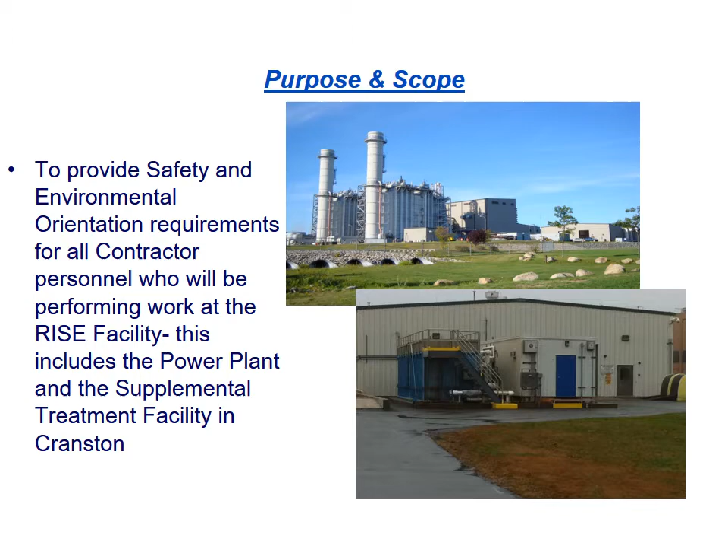The purpose and scope of this presentation is to establish safety and environmental orientation requirements for all contractor personnel who will be performing work here at the RISE facilities, which includes the power plant in Johnston and Supplemental Treatment Facility, or STF, in Cranston. These guidelines are not intended to supersede or replace the health and safety requirements contained in the contractor's purchase order or any other applicable health and safety regulations. All contractors must comply with all applicable laws pertaining to health, safety, or the environment.

Responsibilities. A RISE contractor coordinator is assigned to oversee all on-site contractor work activity. The contractor coordinator will be responsible for ensuring the contractor performs all work in accordance with the guidelines established in this presentation. The contractor coordinator will consult the Production Technician Leader and/or the production manager in cases involving violation of the site safety requirements. In cases involving violations of the requirements, contractor personnel may be immediately removed from the site.

The contractor supervisor is responsible for assuring that the contractor personnel abide by the site safety and environmental requirements reviewed in this presentation. The contractor supervisor is responsible for ensuring that his or her personnel have received the proper environmental, safety, and health training required to perform their work assignment. This is to include any federal and/or state required training.

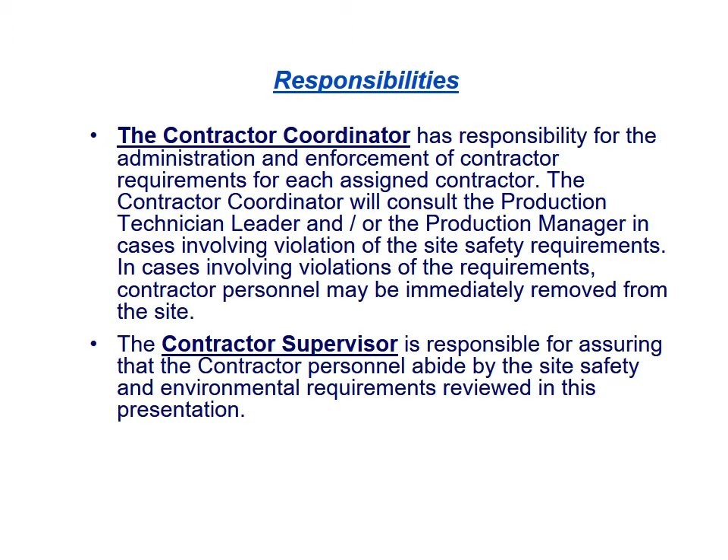Emergencies. Be sure to report any emergency immediately upon discovery to the control room, either by radio operated on channel 1 or by telephone. To report an emergency by telephone, dial extension 555 from any phone in the plant. You can also use a cell phone by dialing the plant number 401-946-2883 and then dial extension 555. You will be connected to the RISE control room.

An individual reporting an emergency should provide at least the following information: 1. The location of the emergency, and 2. Specific information about the emergency, for example, whether there are injuries, number of injuries, fire presence, etc.

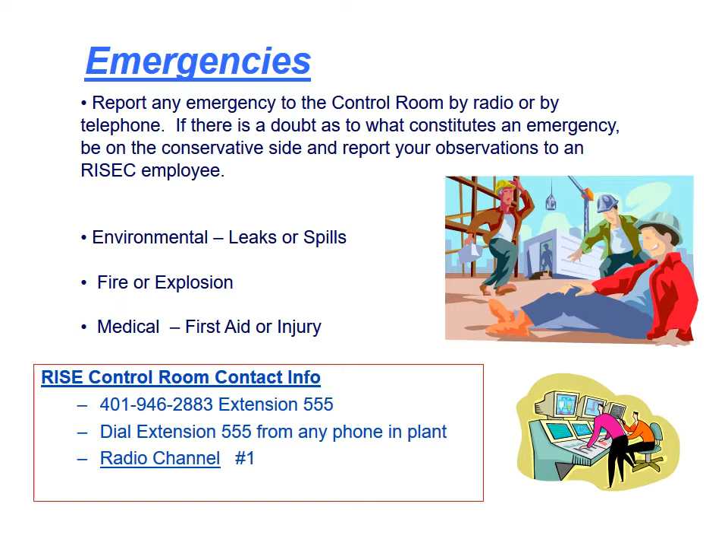There is no first aid facility at RISE plant. In the event of a medical incident, contractor personnel shall immediately attend to their own injured personnel. Emergency medical assistance should be obtained immediately by contacting the control room at extension 555. The control room personnel will contact local emergency medical services. Please do not contact 911 directly during a medical emergency, as this will prevent an organized emergency response from occurring.

RISE plant evacuation procedure. In the event of fire or evacuation alarm, proceed immediately to the designated muster point. The fire alarm at RISE is an electronic, high-pitched alarm that can be heard throughout the plant. The primary muster area is Gate A, contractor or front gate.

Please use the sidewalks provided when entering or exiting the plant. Do not walk on the streets. The secondary muster area is Gate B, located next to the retention pond. Assembly at the primary muster point is near the primary muster point sign behind the guard shack.

During a plant evacuation, all contractor personnel should remain with their designated contractor supervisor at the muster point until further instruction is provided. The contractor supervisor is responsible for accounting for his or her contractor employees in the event of an evacuation.

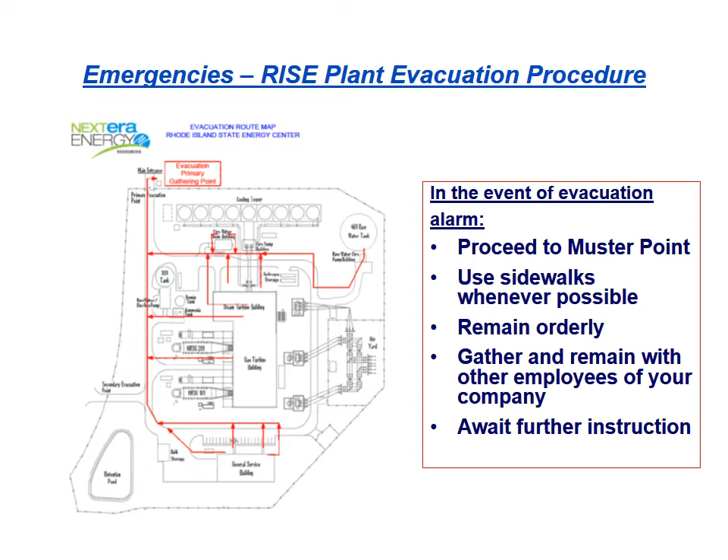General safety rules. If a guard is not present at the front gate, all contractors and visitors must check in at the RISE Plant Administration Building and follow the log in and log out process. There is a 10-mile-per-hour speed limit on RISE plant premises. Seat belts must be worn at all times while riding in vehicles, and riding on the back of pickup trucks is prohibited.

All contractor personnel shall park only in designated parking areas while on site. Smoking at the RISE facility is only permitted in designated locations near the administration building. Ask your contractor coordinator for the location of the designated smoking areas. Under no circumstance should smoking occur elsewhere on the site. Photographs of the RISE facility and equipment shall only be taken with permission of site management. In cases where such approval is given, under no circumstances are pictures to be taken of any personnel.

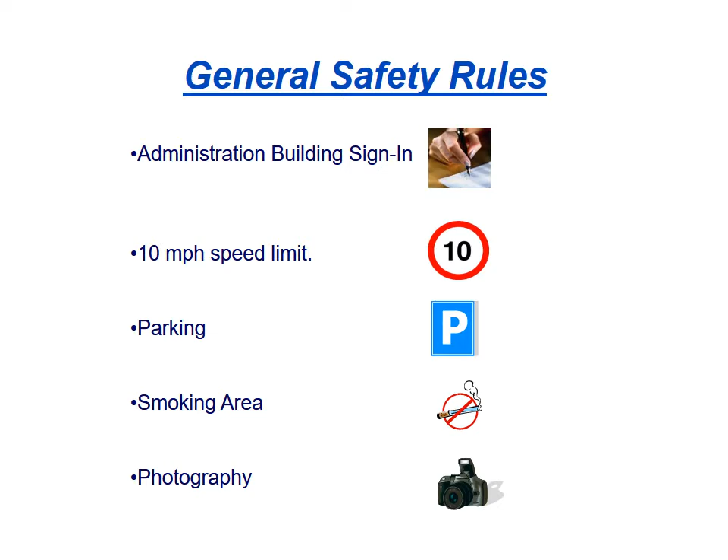No drinking alcoholic beverages on site, including the parking lot and access roads. Cannot be under the apparent influence of alcohol or drugs while performing work at the RISE plant. No gambling, no possession of firearms, no sleeping on the job, no theft of any kind, no fighting, no willfully damaging RISE facilities or third parties' property.

No rings, jewelry, wristwatches, or keychains should be worn while in the power block. Use of the RISE administration building facilities is restricted to RISE personnel. As a contractor, please limit use of the administration building services while working at the RISE plant.

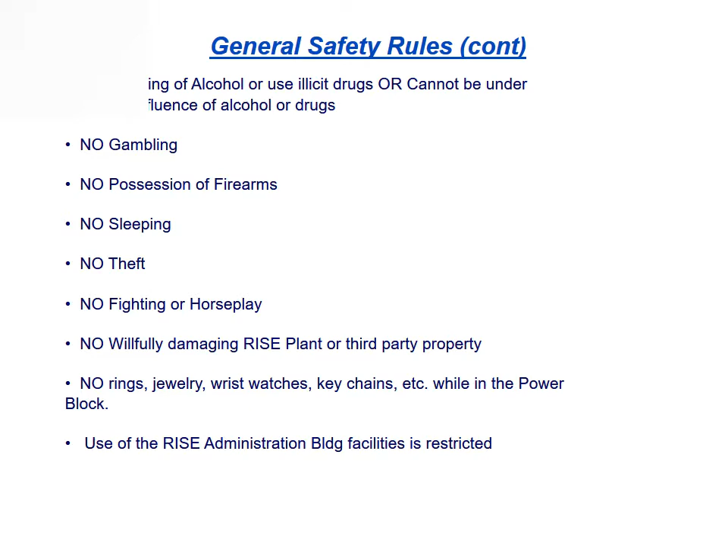Personal protective equipment: while working on site, safety glasses with side shields, hearing protection, hard hats, and steel-toe work shoes shall be worn at all times as per OSHA regulations and site requirements.

Safety harnesses and other protective equipment shall be worn as required when working from unguarded platforms, scaffolds, man lifts, or other structures without guardrails. Fall protection is required when at heights 4 feet above the ground or within 15 feet of unprotected sides.

This equipment must be inspected regularly. Defective equipment shall not be used and shall be replaced immediately. Hearing protection is required in the power block and some other areas of the facility.

Signs are posted at the doors or on the perimeter of all areas where hearing protection is required. Hearing protectors are provided at most exits or entrances to structures by the RISE plant as a convenience to its contractors. A pair of gloves should also be on your person at all times when performing work.

Gloves should be used whenever hand injury hazards are present. The gloves should protect against the hazards present. Work clothes shall meet the following requirements.

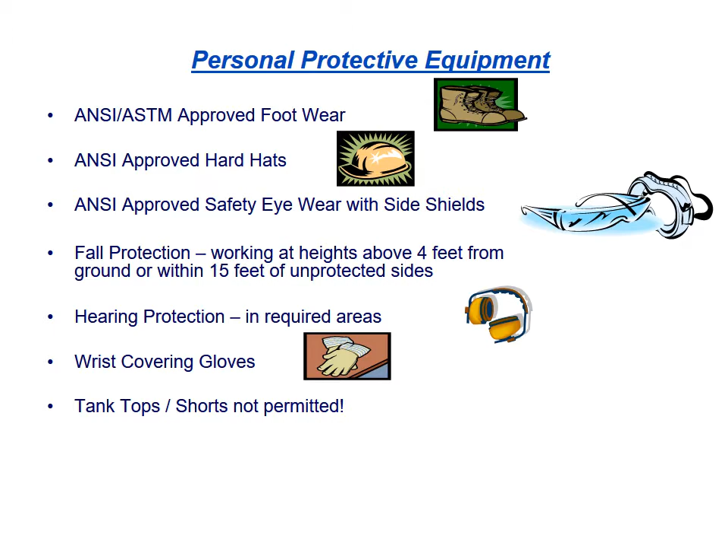Behavior-based safety. Safety and accident prevention is of the utmost importance on all jobs. Behavior-based safety observations, or BBSO, will be performed with contractors, vendors, and employees. Please do not be alarmed if a RISE plant employee is observing your work. It is part of our plant safety culture to perform BBSOs on contractors and RISE plant employees.

Tailboard. Contractors are expected to complete a pre-job safety discussion, job safety analysis, tailboard, risk assessment, or toolbox safety meeting, or pre-job safety meeting, in accordance with their company's policy.

The RISE Contractor Coordinator will verify that a safety meeting took place and obtain a copy of the contractor's pre-job safety meeting form. The contractor's pre-job safety meeting form will be kept on file by the shift PTL in the control room for the duration of the work. On completion of the work, the contractor's form will be discarded unless there has been an event that requires further analysis.

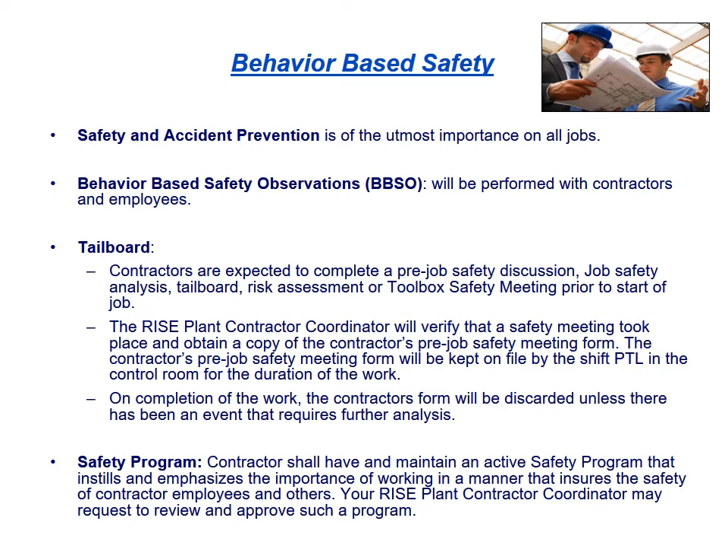Safety program. Contractors shall have and maintain an active safety program that instills and emphasizes the importance of working in a manner that ensures the safety of contractor employees and others. Your RISE Contractor Coordinator may request review and approve such a program.

Under no circumstances is a contractor or vendor to use any RISE plant tools or equipment, as written in the corporate policy. Contractors and vendors are to provide all of their own tools and equipment for performing and completing a job.

Contractors' tools and equipment shall be clearly marked prior to arrival on site. Deliveries of materials for the contractor must be made through the contractor front gate. All contractor trailers, vehicles, toolboxes, lunch boxes, etc. are subject to inspection. Personal property will be inspected with the employee present.

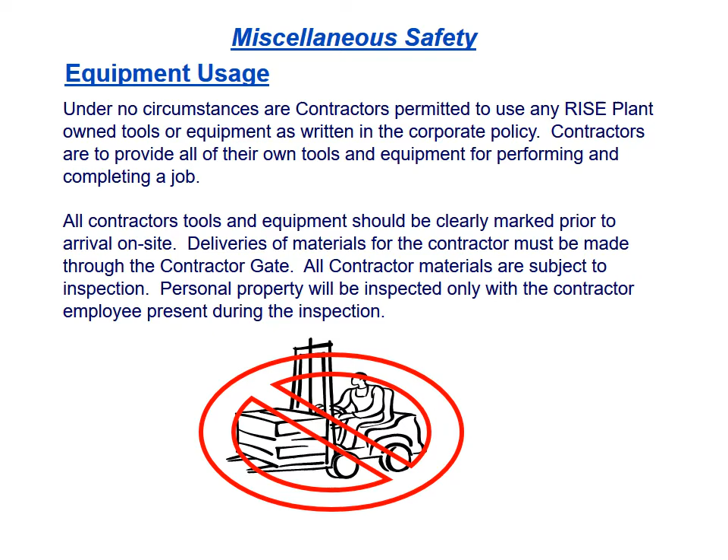Miscellaneous safety. It is a company safety requirement that no wooden or metal portable ladders be used on the plant premises. Certified fiberglass ladders only may be used.

Aisles, walkways, and stairways shall be kept clear of debris, tooling, boxes, parts, electrical cords, hoses, etc. Hoses and electrical cords shall be run overhead so as not to present a tripping hazard. Spills shall be cleaned up promptly and barricaded to prevent a potential hazard to personnel. When working outdoors, jobs that produce light material that can be blown by wind shall be contained.

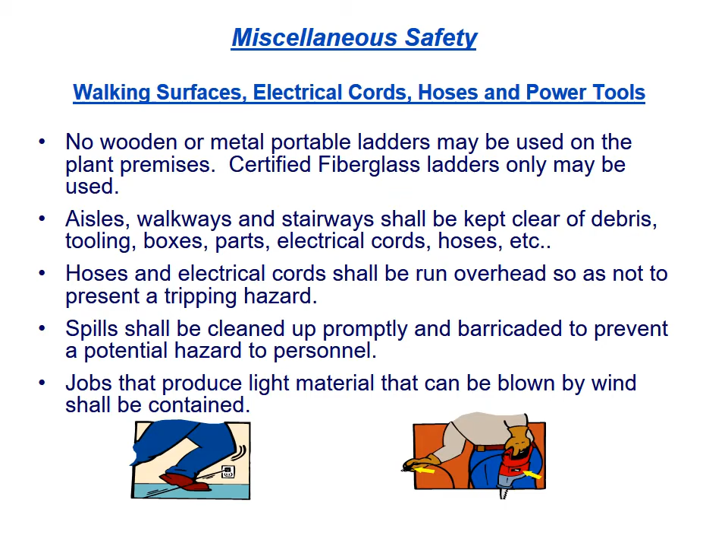Aerial man lifts, forklifts, and mobile cranes. All contractors must be properly licensed where applicable and trained before operating any aerial man lifts, forklifts, or mobile cranes at the RISE plant. Your contractor coordinator will be requesting proof of licensure and training prior to use of this equipment at the RISE plant.

No vehicles shall be allowed in the plant site except those approved by the RISE contractor coordinator. All vehicles entering the plant site shall have the company identification clearly visible.

Contractor shall provide to the RISE contractor coordinator a list of names of personnel qualified or licensed to operate equipment and verification that said personnel have completed the physical and operating requirements of the appropriate OSHA standard. Only those employees qualified or licensed to operate equipment shall be authorized to operate vehicles, forklifts, trucks, and mobile cranes on the plant site.

A spotter is required whenever operating an aerial man lift, forklift, or other mobile equipment within the plant. All operation of mobile equipment within confined areas of the plant should be coordinated with a RISE contractor coordinator. Additionally, required safety checks should be performed and documented on all mobile equipment at least daily.

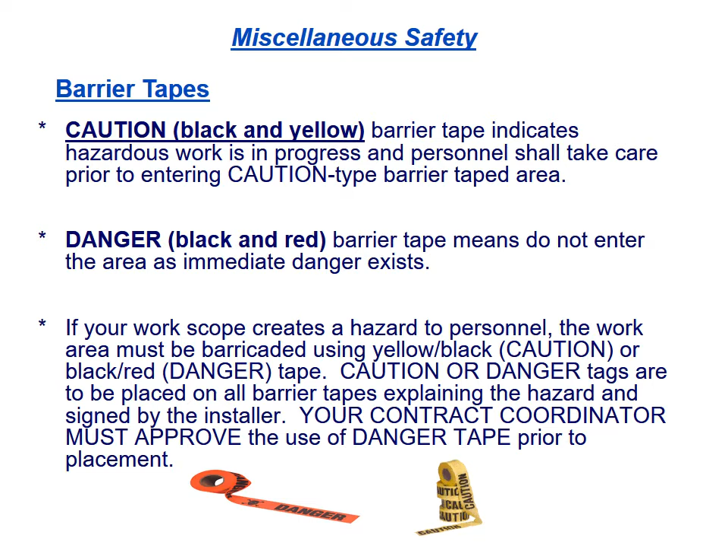If your work scope creates a hazard to personnel, the work area must be barricaded using yellow and black caution, or black and red danger tape. Caution or danger tags are to be placed on all barrier tapes explaining the hazard and signed by the installer. Your contract coordinator must approve the use of danger tape prior to placement.

Ladders, scaffolds, and platforms. Ladder tie-offs are required for all contractor ladders used in the plant. Three points of contact are required when climbing or descending ladders, platforms, or stairwells within the RISE facilities. As discussed previously, no metal portable ladders are allowed within the RISE facilities. Only fiberglass ladders are allowed. All scaffolding used in the RISE plant will have a required inspection sheet.

Additionally, the RISE plant utilizes a scaffold tagging system. Green tags indicate no restrictions. Yellow tags may require use of a harness. Please check the yellow scaffold tag, which indicates whether a harness is required prior to entering any yellow tag scaffold. Red tags indicate do not enter, and are only used during erection and dismantling.

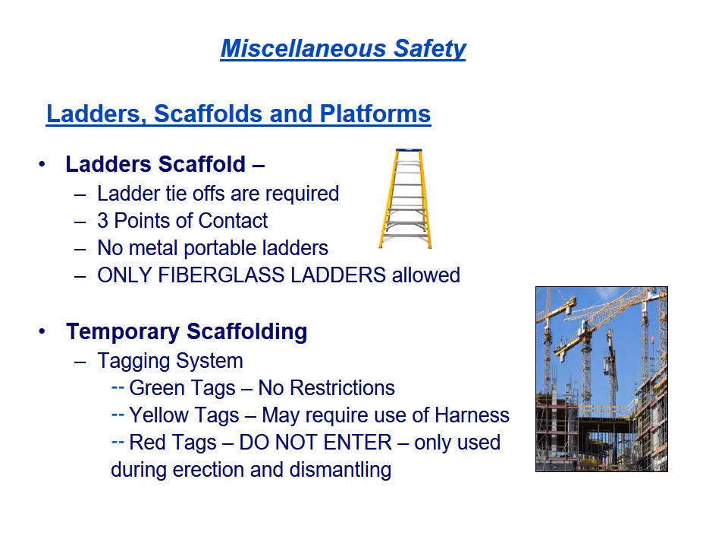Always check the inspection sheet and scaffold tag and assure that the scaffold is safe for entry prior to entering any scaffold.

Compressed gases. Let's take a moment to review compressed gas requirements at the RISE facilities. Cylinders containing compressed gases should always be stored upright with their caps in place in approved safe locations, away from highly combustible material, as well as separated from radiators, furnaces, and other sources of heat. Cylinders shall never be subject to temperatures above 125 degrees Fahrenheit.

Bottled flammable gases such as hydrogen and liquefied petroleum shall be stored in designated locations. Cylinders of compressed gases shall be transported only when they are properly secured in their upright position with caps in place. Cylinder valves should be closed at all times unless in active use.

If a cylinder leaks, attach a tag stating that the cylinder is unserviceable, remove it to a well-ventilated area, and contact the RISE contractor coordinator to resolve disposition.

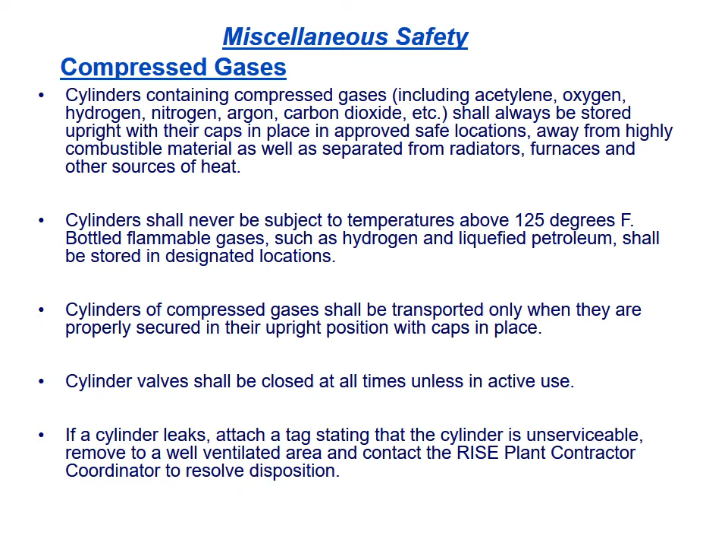Additionally, cylinders shall not be placed where they may become part of an electrical circuit. Fuel and oxygen cylinders shall not be transported in an elevator at the same time. A minimum of 20 feet separation is necessary between fuel and oxygen cylinders in storage areas. All valves, cylinders, regulators, and hoses shall be kept free from oil and greasy substances. Flashback protector devices shall be used. No cylinders shall be taken into confined spaces.

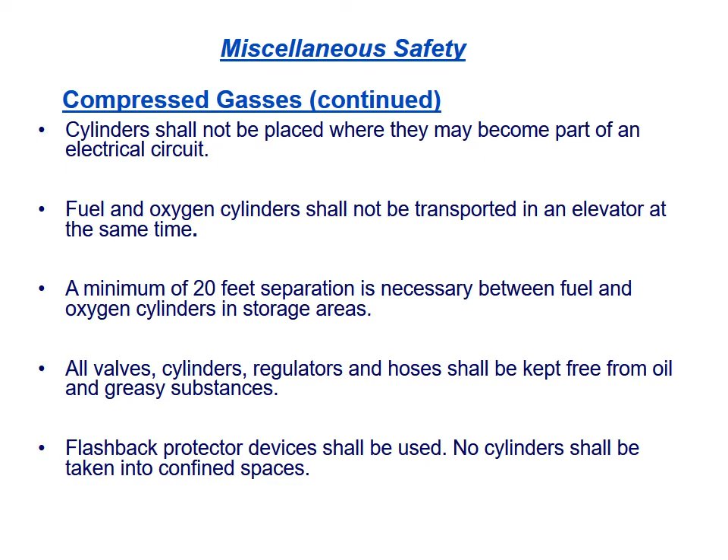Lockout, tagout, in-plant clearance. We will now begin a discussion of three very important safety programs: lockout, tagout, also called in-plant clearance at NextEra Energy, confined space entry, and hot work.

Contractor personnel should not attempt to work on any piece of energized equipment or machinery without fully reviewing and complying with the requirements specified in the NextEra Energy Resources in-plant clearance procedure. Your contractor coordinator will train you on any aspects of the in-plant clearance program that you, as a contractor or vendor, are required to implement.

After orientation, the contractor will certify that he or she understands the in-plant clearance procedure. Failure to comply with the requirements specified in the procedure will result in immediate removal from the site.

Here are some additional highlights of the NextEra in-plant clearance program. Contractor supervisor is responsible for verifying clearance boundaries, ensuring that all potential energy sources have been removed or isolated prior to contractor's employees beginning work.

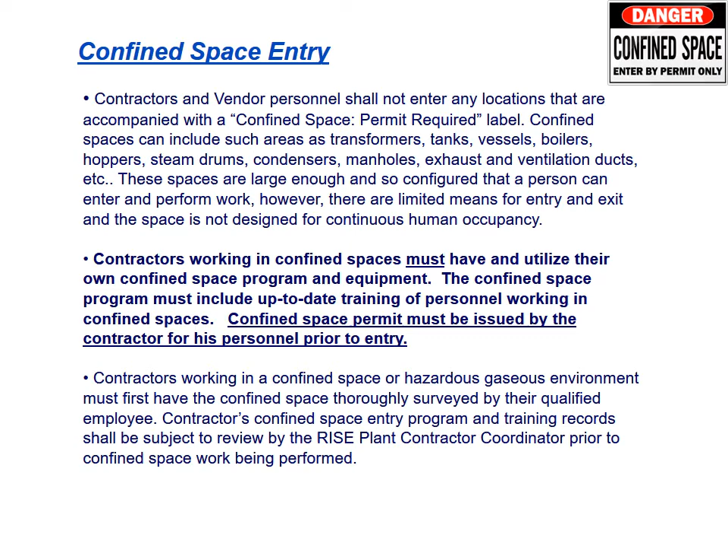Hot work. Contractor and vendor personnel should not attempt to do work such as burning, welding, soldering, grinding, or any work that might create an ignition source without receiving a hot work permit before beginning work. The original hot work permit is to be posted at the job site. A hot work permit is normally only issued for one shift. Please speak with your RISE contractor coordinator if a hot work permit is required.

Stick welding on chrome containing metals, high heat plasma cutting on metals containing or coated with chrome containing materials, and abrasive blasting of structures coated with paint containing hexavalent chrome may be subject to OSHA's hexavalent chromium standard, 29 CFR 1910.1026. This standard may require medical surveillance, use of respirators, engineering controls, special housekeeping, training, and record keeping for subject workers.

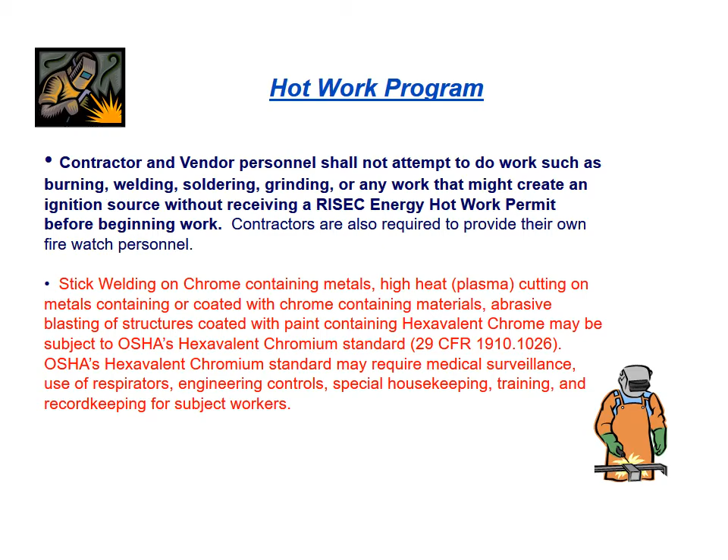Hazard communication. Contractor shall inform RISE contract representative in advance and get prior approval for all hazardous materials contractor intends to bring onto RISE property. No hazardous materials should be brought on site unless required in the performance of the work. Contractors shall provide MSDS sheets and quantities for all products brought on site to the RISE contractor coordinator. Hazardous materials should be replaced with non-hazardous materials whenever possible.

Review MSDS sheets provided for substances present in the contractor's work area. Hazardous materials containers shall be labeled using the HMIS NFPA diamond labeling system to clearly identify the content of the container. When material is transferred from the original container to another container, both containers shall be clearly labeled.

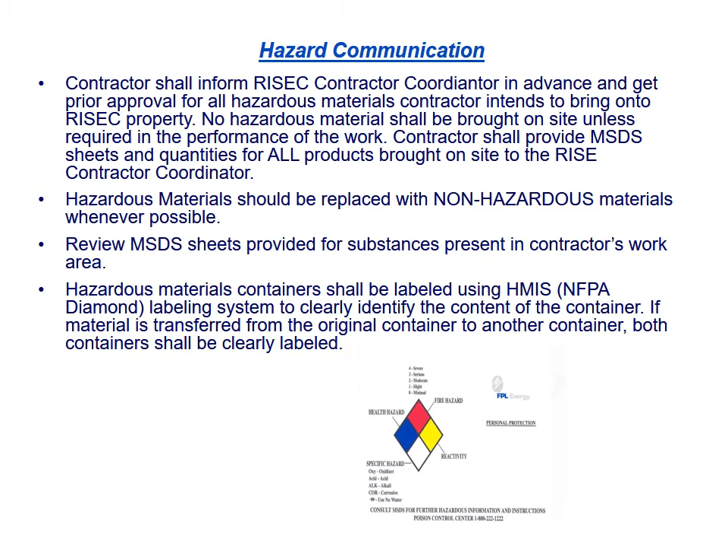Bulk chemical. It is extremely important that all contractors are aware of the potential on-site hazardous chemicals and gases. All MSDSs can be found in the RISE control room or are available electronically through your contractor coordinator. Please take a moment to view the bulk hazardous chemicals designated locations.

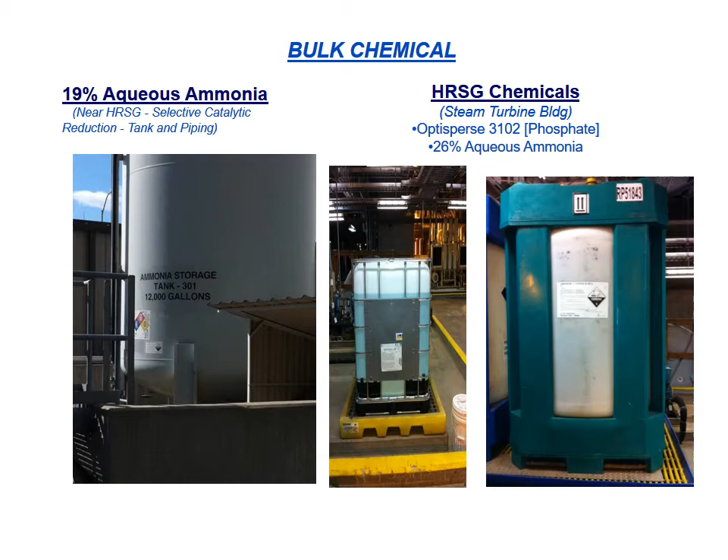19% aqueous ammonia is located near the HRSG. OptiSperse 3102, a phosphate-based boiler chemical, and 26% ammonia are located on the ground level of the steam turbine building.

Additionally, bulk 12.5% sodium hypochlorite and Gengard GN7004 can be found in the Circ Water Chemical Building located south of the steam turbine building. The supplemental treatment facility has bulk quantities of coagulant Klairaid PC2701, flocculant Polyfloc CE 1159, and 12.5% sodium hypochlorite located on the ground level. 12.5% sodium hypochlorite is also stored in the lower level of the STF.

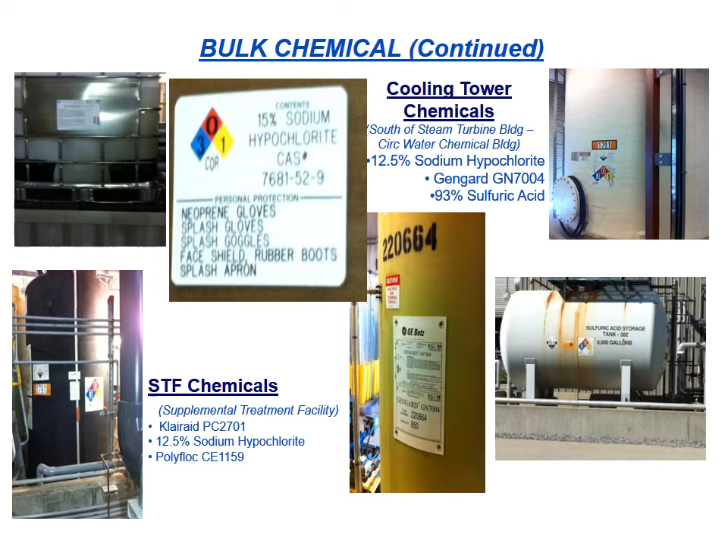Now please take a moment to review the hazardous gases and locations within the RISE plant. We have bulk hydrogen located in storage bullets northeast of the steam turbine building. Cylinder gases are located in a covered area west of the admin building. Carbon dioxide is located in gas cylinders in the steam turbine building and in the combustion turbine fire protection systems located in the combustion turbine building. Natural gas is located in the gas yard adjacent to the administration building and in and around the combustion turbine building.

The RISE facilities do have additional hazards to be aware of during your work activities. There are lead-acid batteries, multiple restricted locations around the site, and high and medium voltage equipment. Please be sure to keep proper distances from the high voltage lines and observe all high and medium voltage warning.

Signage throughout the sites. The RISE facilities have both asphalt paving and crushed rock in numerous locations. There is also potential tripping hazards which contractors must be aware of. Remember to always keep your eyes on path for potential trips, slips, falls, etc.

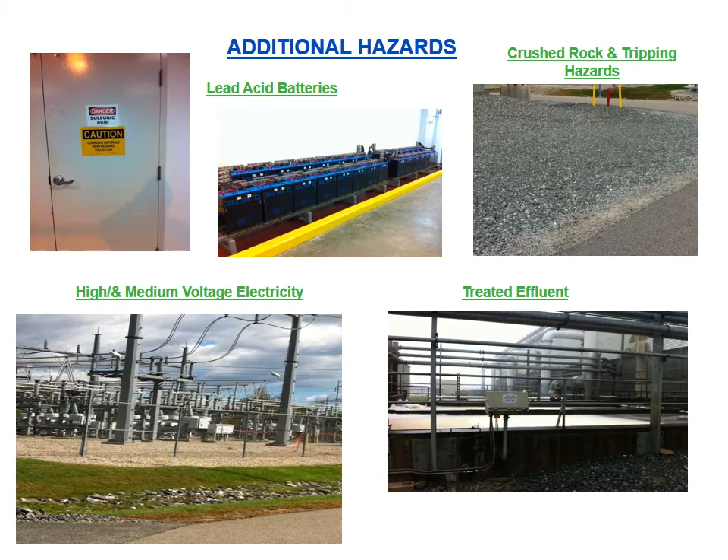Environmental spill or leaks. Now we begin the environmental portion of the presentation. If a spill or leak occurs of any hazardous or non-hazardous chemical or treated wastewater, the RISE plant control room should be notified immediately by dialing extension 555. Do not attempt to clean up any spill, but make every effort to prevent the spill or leak from entering

any storm water system. Any vehicle or operating equipment such as aerial lifts, mobile compressors, forklifts, man lifts, mobile cranes, etc. that are brought on RISE plant property by a contractor are required to be pre-inspected and in satisfactory working order with no fluid leaks.

Additionally, daily checks of the mobile equipment while on site should be performed to assure that the equipment is operating safely and without any leaks. All operating equipment may be subject to inspection by RISE plant employees. Contractors are responsible for the cleanup of any operating equipment, fluid leaks, or spills at their own expense. Additionally, tarps and secondary containments are required when parking any mobile equipment on pervious surfaces of the plant.

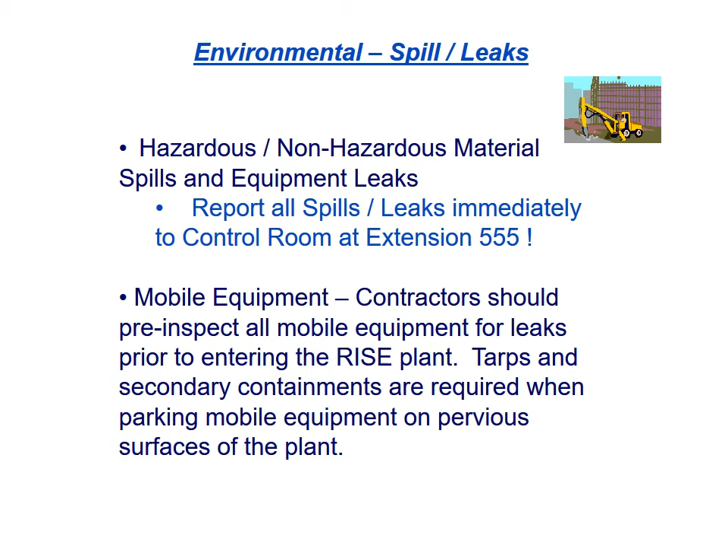Primarily, efforts shall be taken to reduce or eliminate waste generation. Secondarily, efforts shall be taken to reuse or recycle waste. Clearly label all waste containers with a waste description, that is, oily rags, used oil, etc. We maintain a very high standard of cleanliness at the RISE plant. We expect all contractors to actively participate by cleaning up all debris, trash, and leftover materials from their work areas.

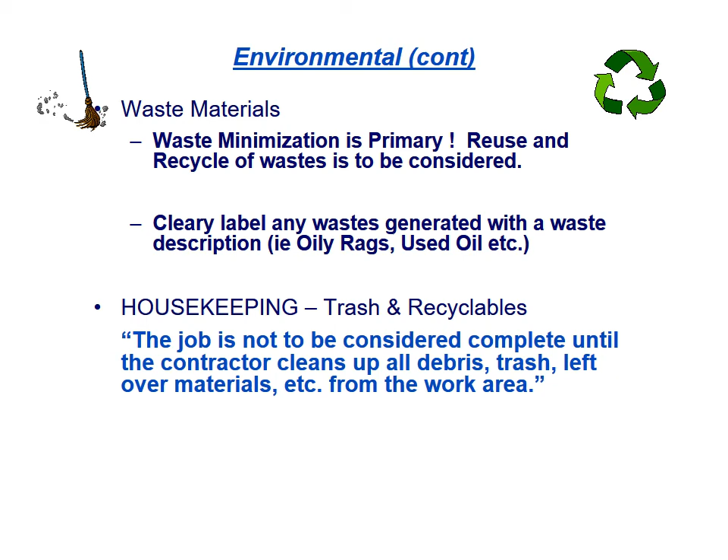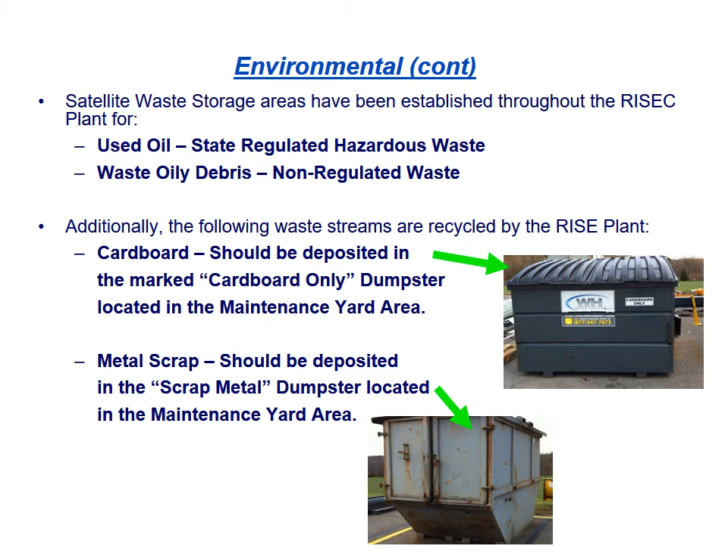Universal hazardous waste, that is batteries, CRTs, light bulbs, and miscellaneous electronics generated by a contractor shall be properly managed. See your NextEra Energy Resources contractor representative for proper management of universal hazardous waste. Please note, the following used items may not be placed in the general trash: aerosol cans, fluorescent bulbs, and oily debris or rags. Contractors are required to take back all commercial chemical products remaining from work activities unless previously approved arrangements are made with the RISE site management. If waste cannot be identified or for special waste disposal arrangements, contact your RISE contractor coordinator.

Physical and cyber security guidelines. Protect personnel and equipment. Report unusual occurrences at RISE facilities, including threats, violence, sabotage, and vandalism. If safety may be at risk, leave the area and contact security operations. Under no circumstances should personnel put themselves in harm's way.

Only authorized personnel are allowed to access, modify, or operate systems or equipment. If you are not authorized or qualified, do not touch or operate equipment. Do not connect any device, including USB devices, into any NextEra system or equipment without the proper authorization. Where applicable, you must obtain the proper clearances.

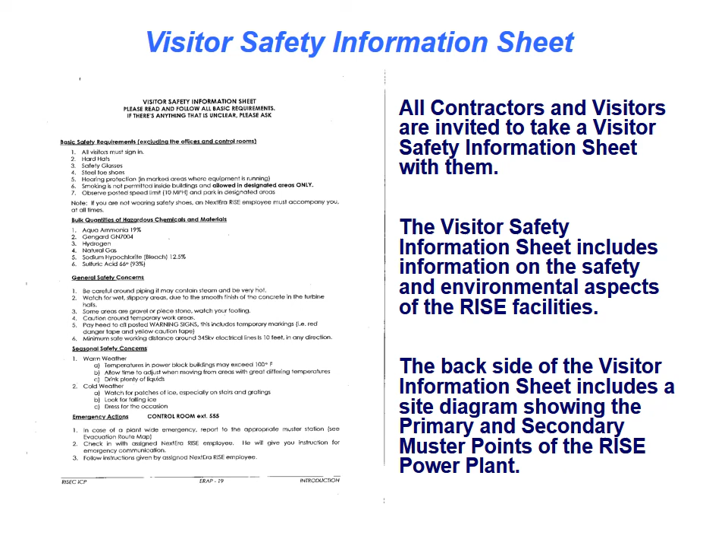This concludes the RISE Facilities Contractor Safety and Environmental Guidelines presentation. If you have any further questions, please see the RISE Contractor Coordinator, who will be collecting the Contractor Safety Guidelines acknowledgement form. Thank you for your time and attention, and please remember to work safely.